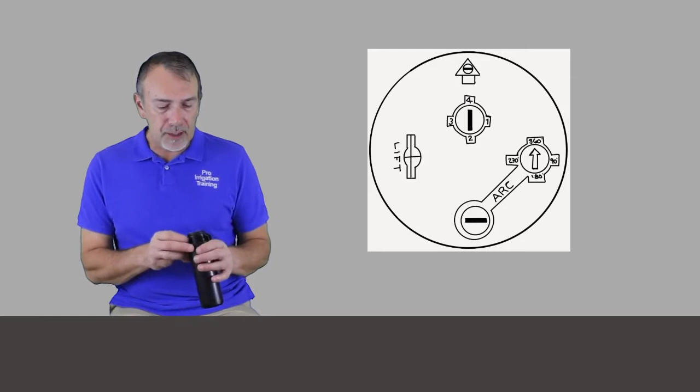If we look at the 12 o'clock position, there's a little arrow there, and that indicates the direction that the water is going to come out. That's the right limit. The right limit is fixed on this head. And the screw down in there, K-Rain calls a breakup screw. Other manufacturers call that a nozzle retention screw. And indeed, it retains the nozzle here.

And if you run the screw down to the point where it impedes the flow of water, then it breaks up that stream, shortens the radius, and flattens out the stream for better coverage in short and medium distances. And if we go further down here, we see the Nozzle Selector. That's almost in the top middle there. And we see a 1, 2, 3, and 4. Those are the nozzle selections.

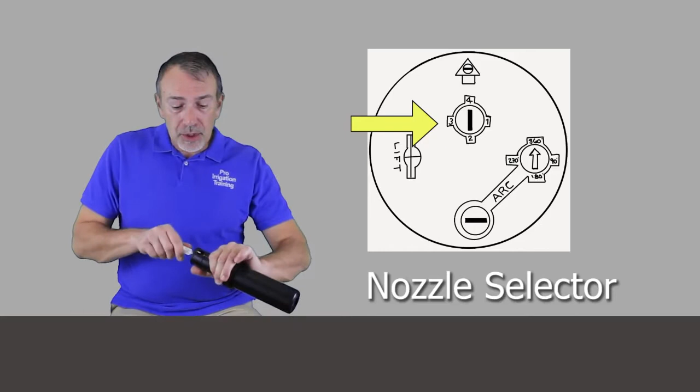And if you put your tool down in here and you turn this nozzle selector, you can see the nozzle turning down in there. So I wouldn't do this too much. I would preset all this stuff before you install it. I mean, you can set it on the fly, but while it's running, it's a little tough to turn this nozzle selector. I would do this just in a dry setting and then turn the system on.

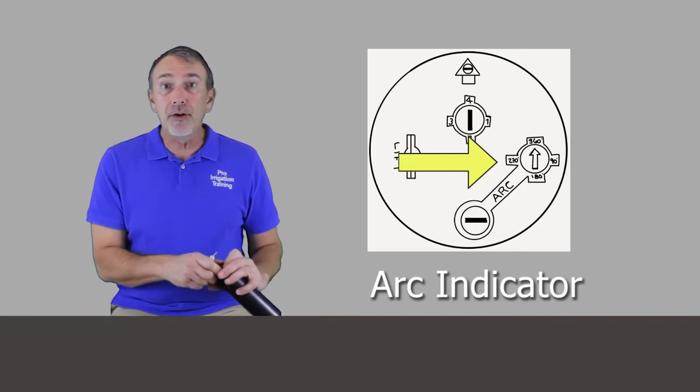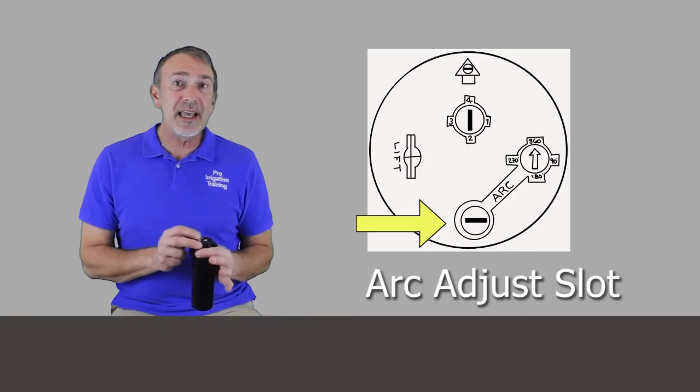Now, down to the right, about the 4 o'clock position, we see the arc indicator. As we change the left limit on this head, this arc indicator tells us what that arc in degrees is. It may say 90, 180, 270, or 360 degrees. And we change that by the arc adjustment slot down here at the 6 o'clock position. And when we change that, we can see that the little arrow changes as well and points to the arc. It's super easy to dry set, super easy to set while it's running.

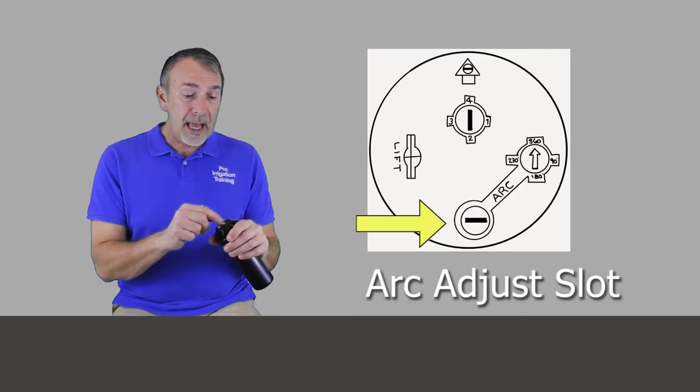But where we set the arc indicates where we should set our nozzle selector. We have a graph here that shows the suggested settings. For nozzle number 1, we see a 40 degree to 135 degree range. So that means if we're going to put our head into a 90 degree or a right corner kind of angle, then we're going to put it on nozzle 1.

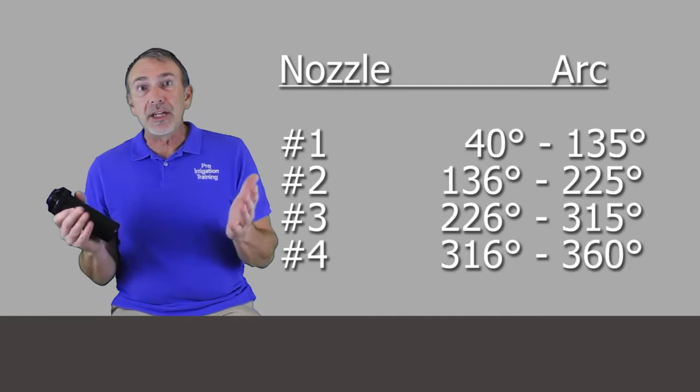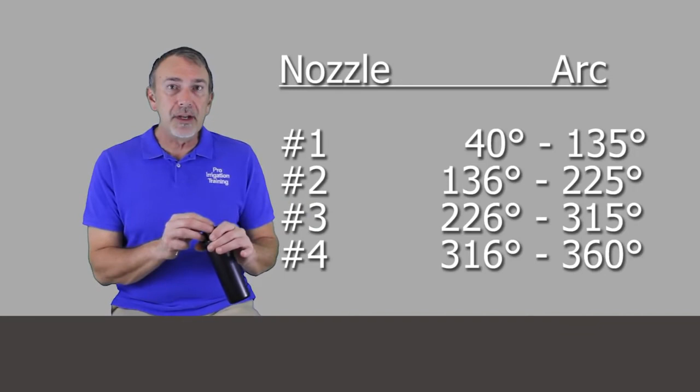If we're going to go anywhere between 136 to 225 degrees, that's nozzle 2. 226 to 315, that would be nozzle 3. So if your desired selection is a 270 or anywhere close to it, then you would choose nozzle 3. And it gives you a range, and usually the main ones, 90, 180, 270, are right in the middle of these ranges. So it's pretty easy to get right. And of course, selection number 4 would finish up with 316 to 360 degrees.

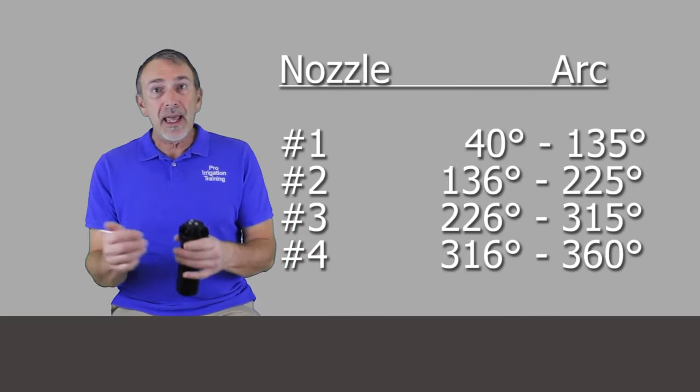So if we were going to set our head to 360 degrees, a full continuous rotation, we'd put it on nozzle 4. And then on the same zone, if we had a 90 degree head, we would put it on nozzle 1, and the precipitation rates would be matched between those two heads. I think that's really brilliant. Let's take a look here at the video of us adjusting this head.